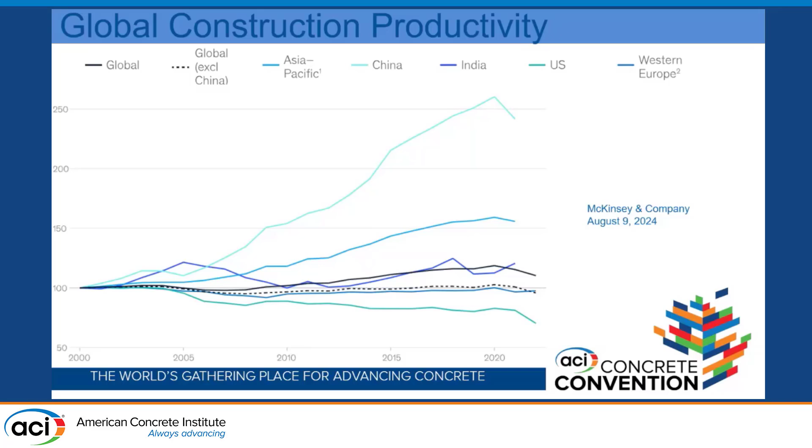But if you overlay construction inflation with the CPI, what you see is that it tracked pretty much with the CPI until several decades ago, and then it spiked up. It spiked up. So I think it corroborates the data that McKinsey is showing here.

Here's an interesting posting from LinkedIn. This is Mr. Scott Kimpland, who I haven't met. He's with FMI Corporation. Most of you probably know FMI Corporation. They do strategic planning and data mining for the construction industry. And Scott Kimpland, I think, summed it up very nicely, especially with number 2 there.

He says, trade contractors, the people who were actually going to build the project, are brought on far too late in the process. The people that know the best and most productive ways to design and build a project are the people that do it every day, the trade contractors.

So the point he's making is that too often the people who are actually going to build the building are brought in so late that they have no impact on the value engineering that could have been done had they been brought in earlier. And we see this, all of us in this room, I'm sure, see this all the time. People who are actually going to build the building in a traditional design, bid, build environment get brought in too late, and they have no impact.

And they see all kinds of things where there's low-hanging fruit here and there and everywhere else, but the drawings are done, the design team is out of money. That happens a lot, where you go back. We get calls sometimes on projects, can we change this or change that? And the first thing you do is you look at your budget and think, oh my God, we're out of fee. And if we can go back to the client and get more fee, maybe we can accommodate the change.

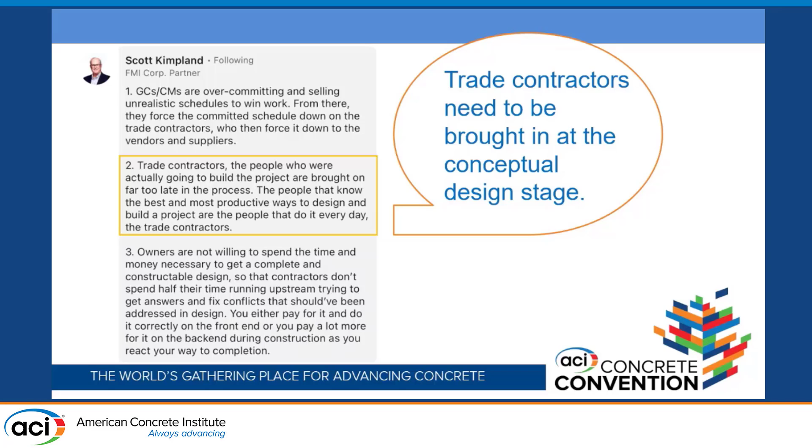And so you size up who your client is, and if you conclude that there's no way I'll get a penny out of this guy, then you probably don't make the change. You say, sorry, but we got to build it the way it is because there's no way I'll get more fee. So I think Mr. Kimpland made a really good point.

Talk briefly here about ACI and PRO. Many of you probably understand this, but PRO is a separate entity from ACI, so it's a separate 501c3 entity with our own board, our own mission, vision, values, an executive director, Phil DeKemper, and yet we're joined at the hip to ACI. So it's a beautiful arrangement because we're separate and autonomous, and we can move as quickly as we want to. We can develop documents, constructability blueprints, training programs. We don't need to go through the vetting process that is mandatory for ACI.

So we're separate from ACI, which allows us to move quickly, and yet we're joined at the hip, which gives us the advantage of ACI's marketing and all sorts of other administrative resources. We get assistance from people like Rex Donahue, Mike Tholen, who I see back here. And so it's a wonderful arrangement, the concept of a center of excellence that PRO is one of.

The strategic initiatives, I won't read through all of these. You can see there are 6 of them, beginning with constructability at the top. And our focus thus far has been primarily on constructability because our belief is that if we can encourage designers to learn more about constructability, to think more about it while they're designing, to focus more emphasis on it, we can move the needle pretty significantly.

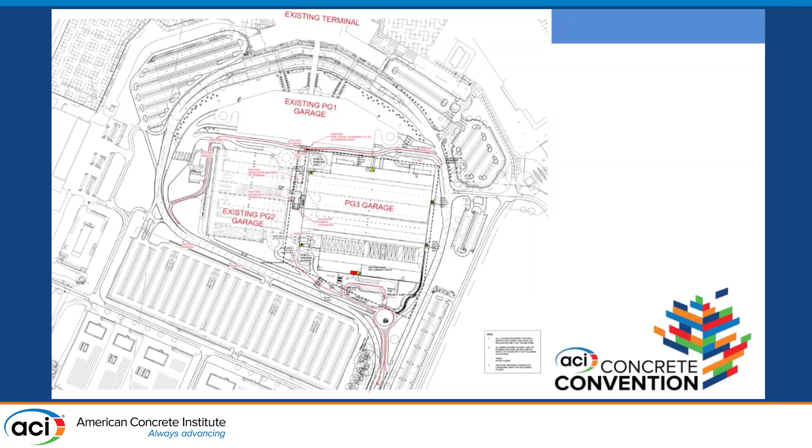So we developed a relationship with the engineer right out of the gate to design 2 million square feet, 7,000 cars of parking that's now under construction in a very cooperative manner. So let me show you some pictures of this. So here is the airport. This goes back prior to the construction of PG3.

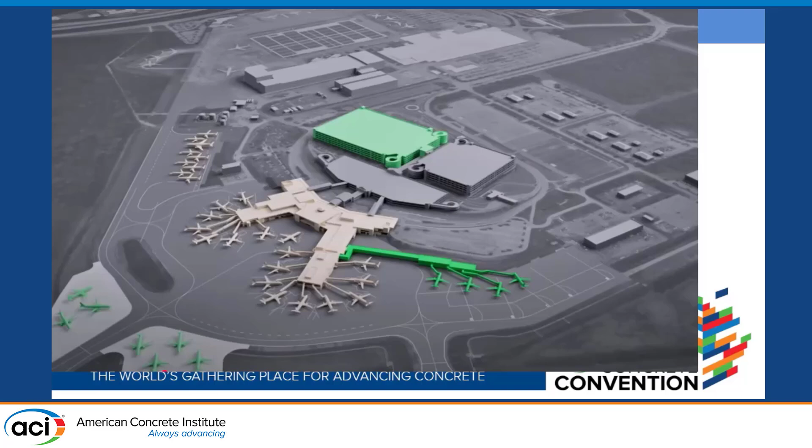Another illustration of what it looks like. This is, of course, a model, but the green one is the new one that is now under construction. Just to the right of that green garage, you see the one that we did a few years back, and it's being triggered by growth in the Charleston market, and I guess the number of incoming flights in Charleston has increased to the point that it justifies 7,000 cars of new parking.

Boeing being down there, I don't think hurts them. They built the 777 there or the 787, I'm not sure. I think they built the 787, yeah, in Charleston. Anyway, here's a model. This is from our office of PG3, 6 stories. This is all long span Cunningham system, if you're familiar with long span cast in place parking.

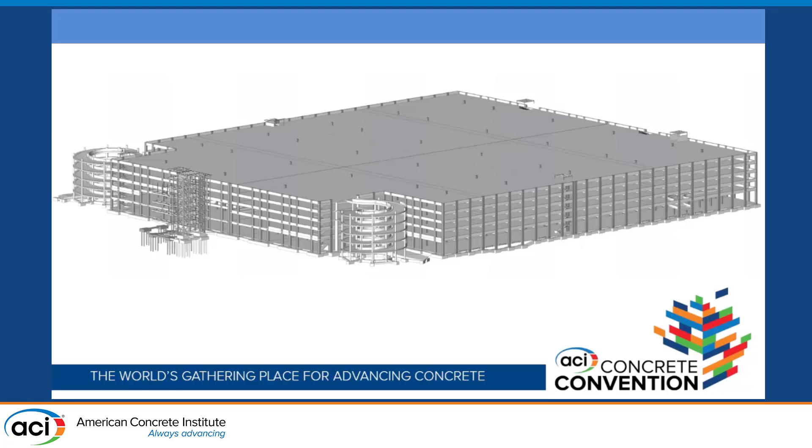And you know, the whole key on a parking garage, and luckily I learned this a long time ago, before you start designing structure is think about 3 things: formwork, formwork, and formwork. Because if you really learn all you possibly can about the forming system, how it's laid out, how it moves, how you can maximize the productivity of the formwork, everything works well.

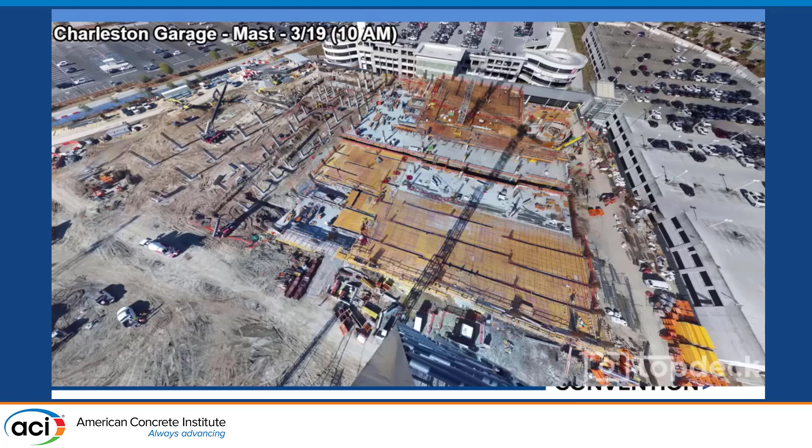So that's how we approach this in conjunction with our engineering partner in Charleston, who we teamed with. Here it is under construction. This is just a couple of weeks ago. These pictures came from Baker, I believe, or Whiting Turner, I don't recall which. But in any event, these are very, very recent. So this is the first quad going up. And you can see, let me go to another picture.

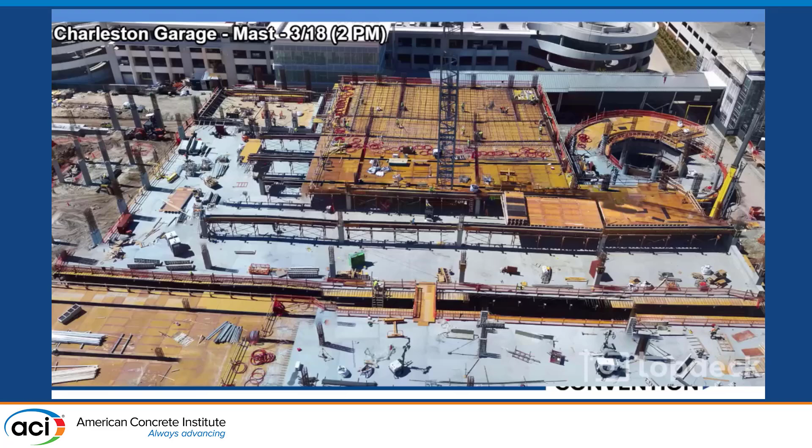Here's a good shot. So here you see, just below where you see the plywood deck panels, one of the beam forms in place. And that's really the key to these Cunningham garages, is to understand how those beams are set up and move. They sit on a 5-foot wide scaffold tower.

So you've got a steel beam form that sits on a 5-foot wide scaffold tower with a ledger, and then your deck panels sit on that ledger, which means the deck panels require no shoring, no reshoring. You reshore only at the beam lines. It's a very mechanized, sort of Henry Ford industrialized process.

And if you train yourself when you're laying out a parking structure, or any structure for that matter, to think about mechanization, the sort of Henry Ford mindset. How can we introduce as much standardization and as much mechanization to the process of building this building as possible? And with parking structures, certainly you can do that to a much higher degree than a lot of other building types.

But here it is. This is quad 2, so the other pictures were the first quad. Here's the second quad, and up it goes, and it's so far going along very, very nicely. All right, let me jump to another project.

This one is up in the Pacific Northwest, just outside of Seattle, out towards the Cascade Mountains. This is a gaming casino, a tribal casino, and the building I want to show you is the one on the far left. It's a 15-story hotel. We got involved in this project through an architect in Las Vegas about 3 years ago

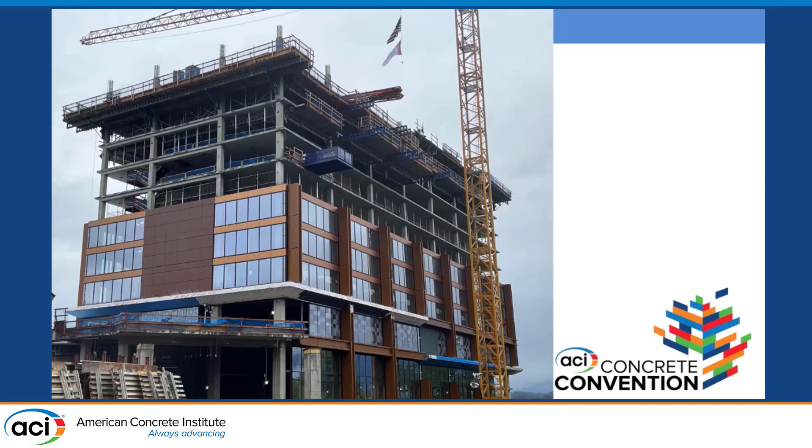But when that discussion began, their first choice for the building was column-hung, and we'd already laid it out to facilitate column-hung, so it was a beautiful marriage. From that point on, it was just a matter of coordinating details with the contractor and dotting I's and crossing T's. So there's that 15-story hotel. Here it is going up. And here is a close-up of them actually flying one of the tables.

The cool thing about column hung, if you've been exposed to it, you understand this. If not, the tables actually rely on the columns for support. So you're supporting your deck panels off of the column, which is there anyway. Why not use it as shoring for your deck panel? That's the basic idea behind column hung.

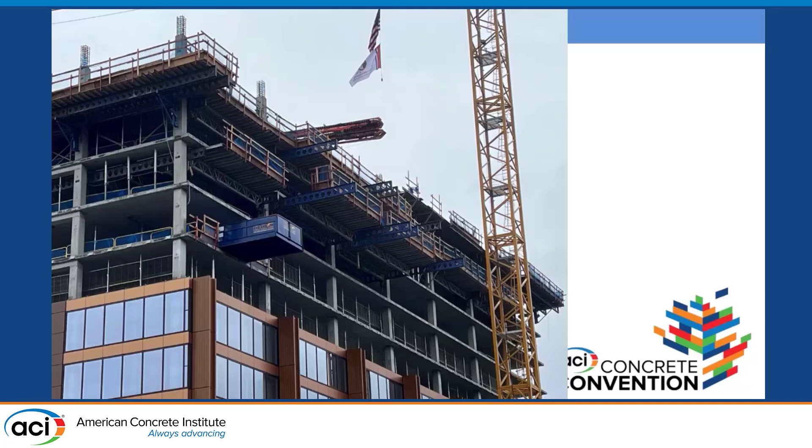The challenge with column hung is that the vast majority of buildings don't allow it because of the way they're laid out. But if you understand the nuances of how that forming system works the day you start laying out the building, you can lay a building out that will accommodate column hung more often than not. And this worked very well. Big success story.

Here's another picture off a different project that we did a few years back. This is standing on the deck directly below the level at which rebar is being placed. This is the 31-story tower in downtown Seattle. You can see the deck panel above sitting on, maybe that's too dark, a bracket on the column that's bolted through the column, and then a ledger, a stringer, and the deck panel sits on that stringer.

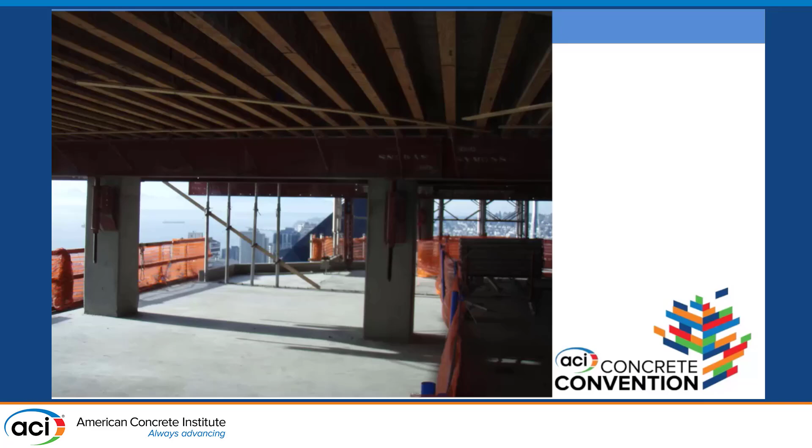So you can actually be doing other activities on the level immediately below the one that you're placing rebar on. Back to the project at Snoqualmie, the hotel I showed you. Here's the layout. This is the kind of layout that you can create in hotels. It's harder to create with other building types. Hotels are about as good as it gets for laying out column hung or any kind of fly form system because of the way your rooms modulate, 13 to 14 foot rooms, 28 foot bays.

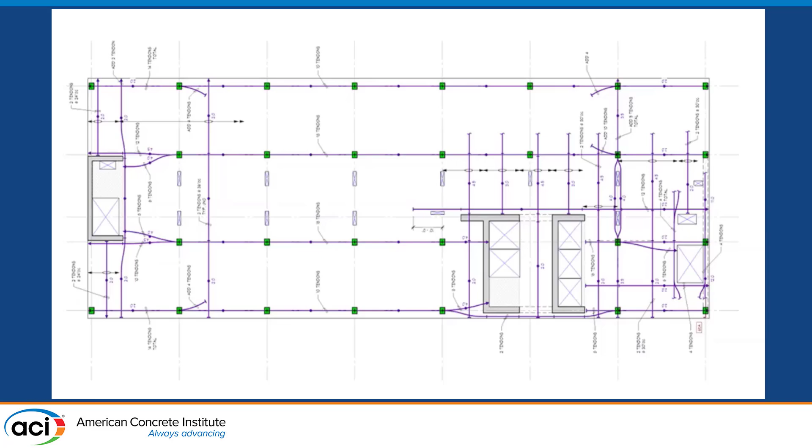So granted, it's easier to lay out a column hung system for a hotel than many other building types, but it becomes an awful lot easier when you understand it going in and you collaborate with the contractor while you create the layout. Here's a third building. This is a few years back in Seattle.

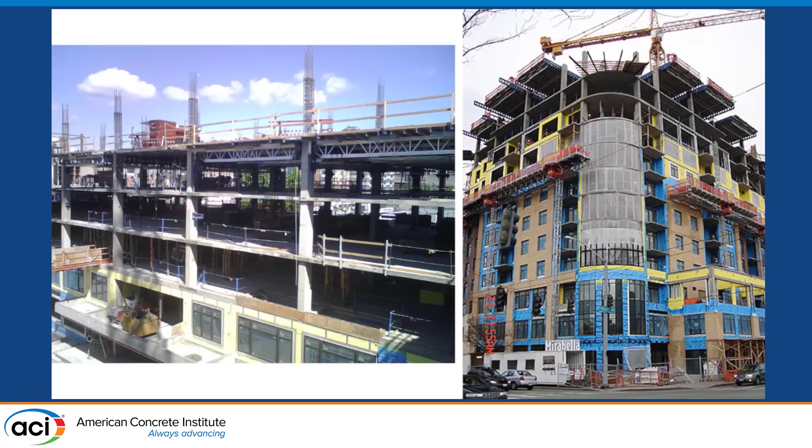You can see again the tables on the left and on the right. The interesting thing about the picture on the right is look at the skin on the building. You're within a couple of floors of the work deck, because you have no shoring and no reshoring. With a column hung system, if you lay it out right, your shoring and reshoring are gone, so you could be doing other activities 2 levels below the structural deck. Pretty cool way to build.

Let me go now to a video, if I can get this to play. It worked. It's about a 1-minute video.

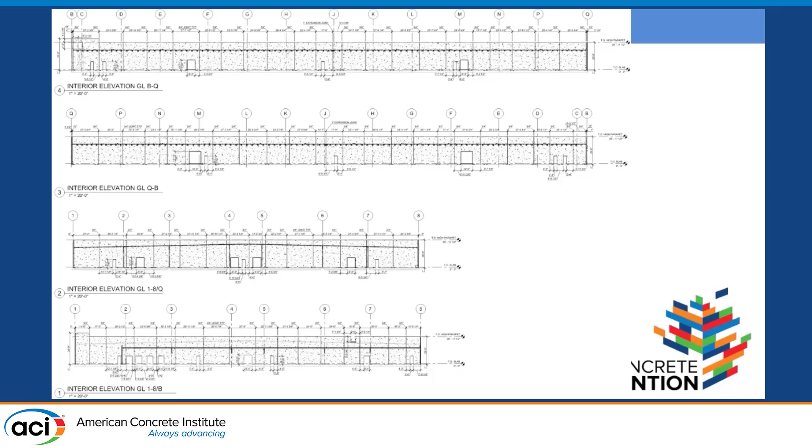So we went back to the architect. Well, first we actually called the contractor. And we said, in a perfect world, what would your panel width be? If you could tell us what panel width you want, what do you want? He said, I want between 25 and 30 feet. That'd be my ideal. So we picked 28 foot 6. And so we redid all the panels, and you can't see these dimensions, but I'll describe it to you.

If you look at where we ended up, about 80% of the panel widths are 28 foot 6. So now your horizontal rebar is all standardized. It's all the same. When you build your panels, you're just building the same panel over and over again. The other 20% of the panels are slightly different because of circumstance. But with just a few phone calls, touching base with the builder to see what panel width he preferred, touching base with the geotechnical engineer and just asking some questions instead of reading the report and assuming that it's all gospel, which it never is, we radically changed the trajectory of this project.

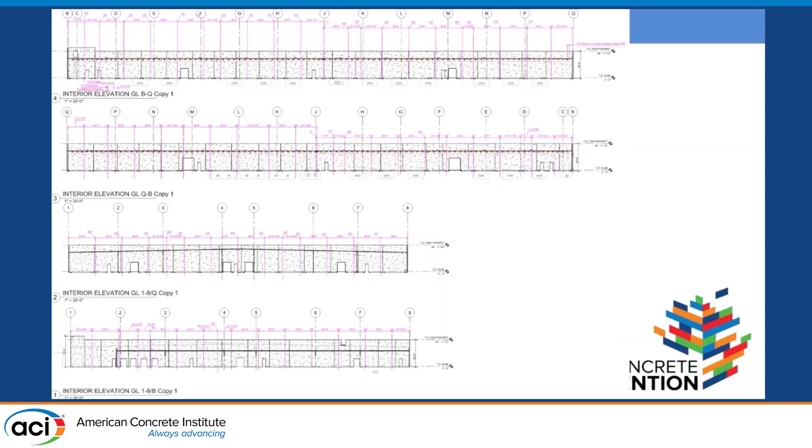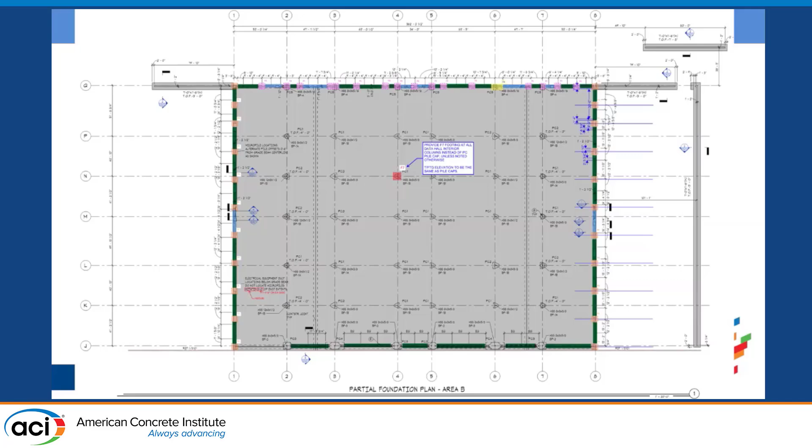So it's a massive change in course for the project for the benefit of everybody, designer, builder, owner, a lot faster. Contractor loves it. The geotech is happy. He's happy with ground improvement. But it just took some initiative to believe in the power of collaboration. To Chad's story, if you create teamwork, get people out of their silos, get them working together, get them caring about other trades and other activities, you can create magic.